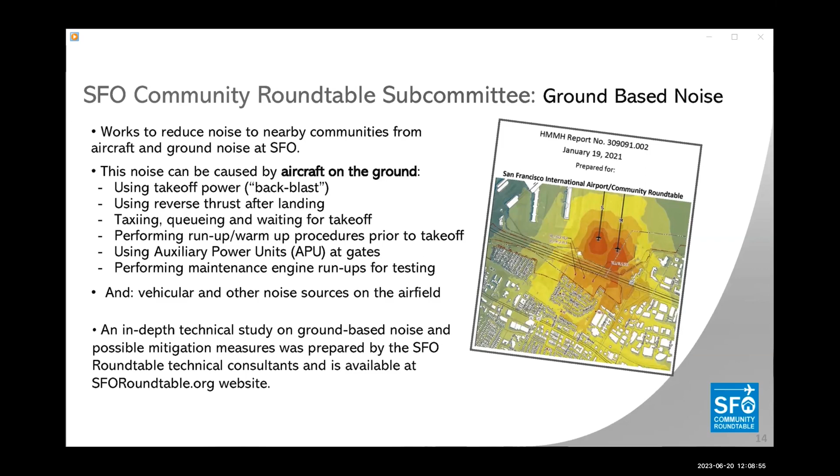The Ground-Based Noise Subcommittee works to identify and mitigate the noise impact of aircraft takeoff and on the ground at SFO, and other SFO operational noise. SFO Roundtable consultants have prepared an in-depth study on ground-based noise at SFO, available on the Roundtable website.

The Legislative Subcommittee reviews and advises the Roundtable on proposed legislation and FAA actions, as well as monitoring the actions of the Congressional Quiet Skies Caucus and legislative activities of other groups.

The Portable Noise Monitoring Placement Subcommittee makes recommendations for the placement of SFO's portable noise monitors. The Work Plan and Strategic Plan Committees develop plans for short-term and longer-term goals and priorities for Roundtable activities.

The Roundtable has long focused on the detrimental effects of nighttime airplane noise. Nighttime noise is not just an annoyance, but a serious health issue for residents. Many health studies have found that nighttime noise, including airplane noise, may cause significant health impacts, including increased risk of cardiovascular disease, impaired control of blood glucose, and increased inflammation. In addition, sleep deprivation can interfere with learning for children.

In 2016, the Roundtable made a recommendation to the FAA to create a new nighttime noise abatement flight procedure that would replace a noisier departure path. After extensive collaboration with SFO, the FAA, the airlines, the public, and a dedicated local member of Congress, the night departure southbound transition was implemented in May 2022.

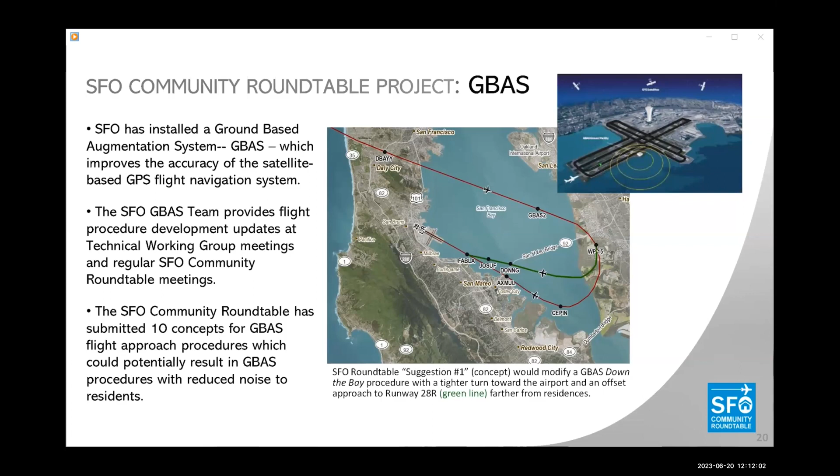The Roundtable has submitted concepts for possible GBAS flight procedures, which, if implemented, could potentially decrease flight noise to residents.

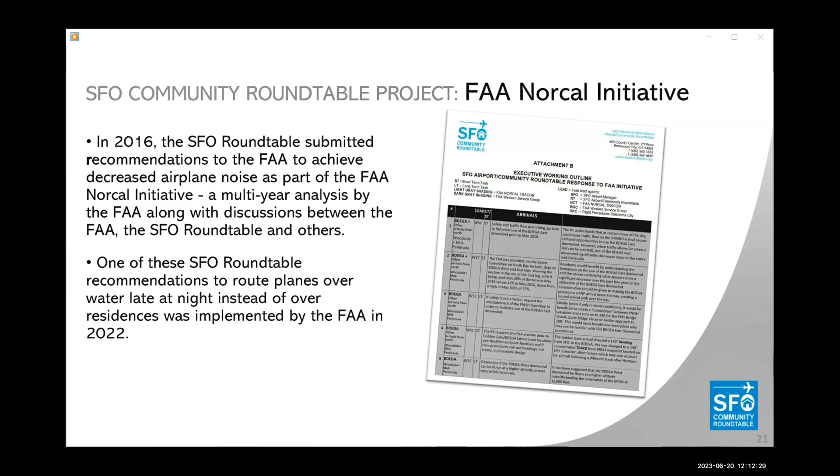In 2016, the SFO Community Roundtable submitted recommendations to the FAA for changes to flight procedures which could decrease noise. After a multi-year FAA analysis and many stakeholder discussions, several of the recommendations were deemed feasible. One of these, the night departure southbound transition, a nighttime noise abatement procedure, was implemented.

Lastly, we invite you to visit the SFO Community Roundtable website, where you'll find the Noise 101 program and other aviation resources, along with Roundtable meeting materials, archives of previous meetings, and technical reports from the FAA, SFO, and Roundtable technical consultant. Thank you for joining us today for this Noise 101 introduction to the SFO Airport Community Roundtable.

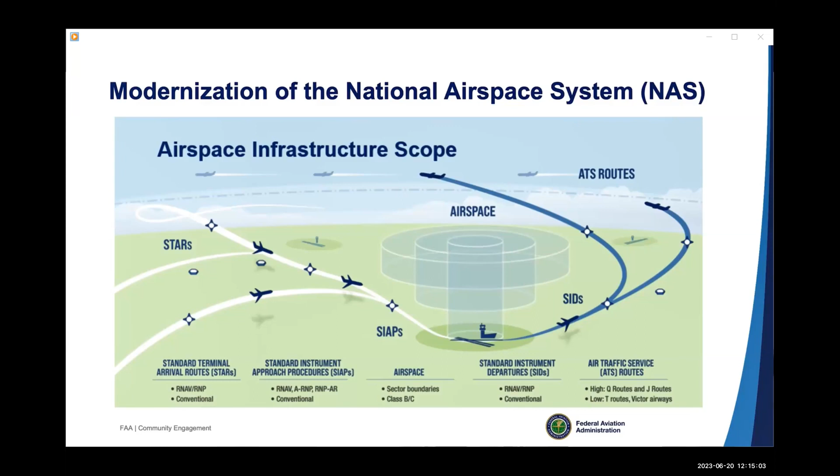These components all come together to deliver safe and efficient air traffic services. Our objective is to deliver the right airspace and procedures to meet current and future needs, optimize the inventory so that the FAA does not maintain unnecessary procedures, and modernize the airspace and procedures to deliver maximum benefit within manageable scope. The FAA is developing an airspace modernization roadmap, which will serve as the agency's strategic plan to continuously evaluate and modernize the national airspace system.

The roadmap builds on the 2016 PBN NAS navigation strategy. The agency is working to determine regional priorities and modernization schedules based on current and projected operations and associated needs within respective service areas. The FAA will also work with regional teams to consider airspace infrastructure priorities based on integrated qualitative and quantitative data analytics and analysis to provide optimal returns in safety, efficiency, and sustainability.

To reach the next level of safety and efficiency, the FAA is continuously modernizing the airspace infrastructure so that it will accommodate expected growth in traditional operations and new entrants. Via our ongoing modernization efforts, the foundation and enabling elements of a modern aviation infrastructure are in place and delivering benefits today. Through collaboration with the aviation community, the FAA enabled the rebuilding of our aging infrastructure into a system that is prepared to accommodate new technologies and new entrants with a resiliency for future needs.

The future NAS will continue to improve flight safety and ensure the safe accommodation of aircraft, as well as non-traditional types of aviation, such as commercial space and advanced air mobility. For more information about air traffic management modernization or the next generation air transportation system, visit faa.gov or go directly to the links provided.

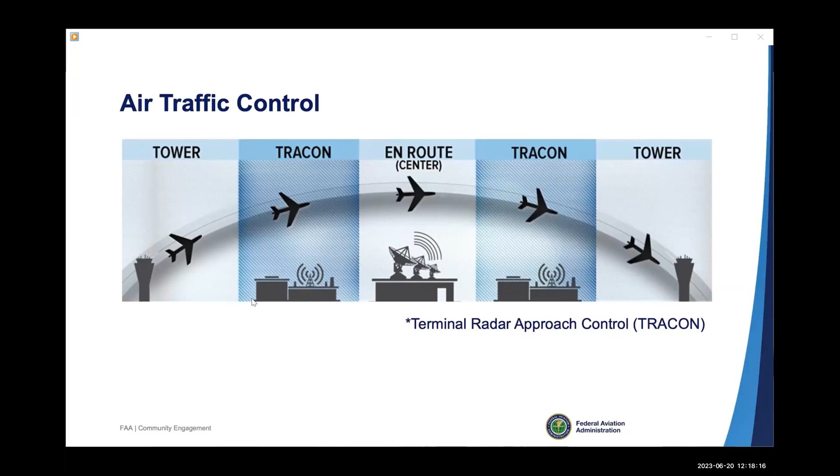FAA air traffic provides safe, secure, and efficient management for the national airspace system and international airspace assigned to U.S. control. Air traffic is responsible for airport traffic control towers, both federal and contract, terminal radar approach control (TRACON) facilities, air route traffic control centers, and combined control facilities to guide aircraft through their various phases of flight.

At the SFO Airport, tower controllers are responsible for all airport movement areas and airspace within approximately 5 miles of the airport and up to 2,000 feet above the surface. They separate all aircraft, including arrivals, departures, and overflights. The SFO tower controllers also issue clearances to allow visual flight rules (VFR) aircraft to enter, transition, or exit their airspace. They coordinate with Northern California TRACON and Oakland Control Tower regularly.

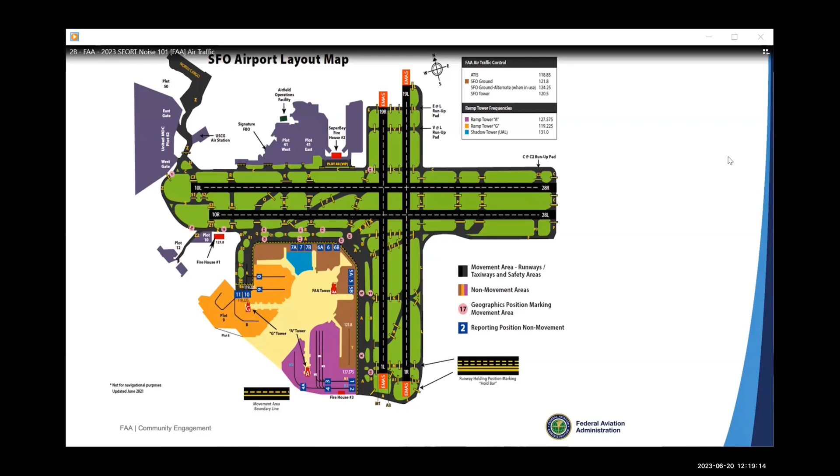Tower controllers are also responsible for ground vehicles in the protected area surrounding the runways and taxiways. Whether it is an aircraft, ground vehicle, or mower in the grass, everything that moves on the ground at an airport is controlled in some way by the controllers in the tower. In addition, controllers ensure flight plans for the aircraft are correct, give pilots permission to take off or land, cross runways, or taxi to active runways.

Safety is the FAA's #1 concern and will always take precedence. Airplanes perform best and have the greatest safety margins when they land and take off into the wind. Runway and procedure modifications at SFO were developed with both safety and noise in mind. The tower will assign noise abatement preferred runways as long as wind and weather permit.

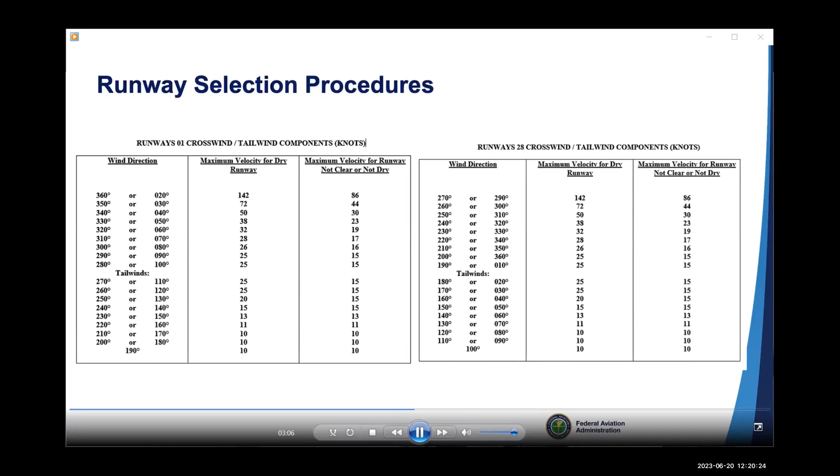Departures are paths assigned to an aircraft and determined by its destination. Departure routes out of the Bay Area must tie into the national route structure and then into the arrival route structure for the destination. The busiest air traffic corridor in California is between the LA Basin and the Bay Area.

The arrival paths assigned to an aircraft are also determined by its destination. There are many factors, however, that can force an aircraft to alter its route once airborne, such as weather, traffic volume, military activity, emergencies, and so on.

San Francisco arrivals are routed over the Oakland and San Jose arrivals, but must be under the San Jose Loop boomerang departures. Oakland arrivals are routed over San Jose arrivals, but must be under the San Francisco arrivals and the San Jose Loop boomerang departures.

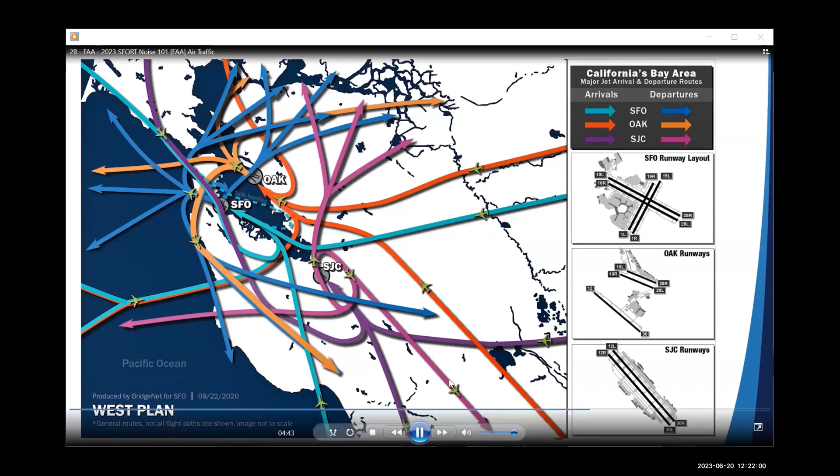Southbound departures off both Oakland and San Francisco are dynamically controlled to keep them separated from the San Jose departures and the San Francisco arrivals. These departures would typically be above oceanic arrivals.

Community-driven initiatives are made possible through the FAA's ongoing community engagement efforts, coordination with the SFO Airport Community Roundtable, and collaboration with stakeholders. In 2022, at the request of the SFO Roundtable, the FAA agreed to route southbound aircraft departing SFO and OAK between 1 a.m.

and 5 a.m. over the SFO Bay and either out over the Golden Gate Bridge to Gobbs intersection before turning them south-southeast, or down the bay using headings off runway 1 at SFO and runway 30 at OAK. This graphic shows the NIITE/HUSSH procedures and some 120 degree headings.

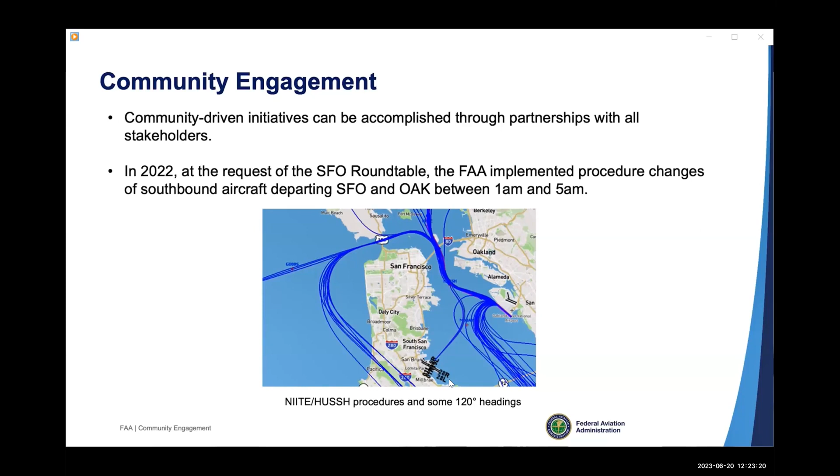The recent update to these procedures is one example of the change that originated with the community and was implemented through collaboration of various stakeholders.

For more information about the Western Pacific Region Community Engagement, NorCal workshops, and the Instrument Flight Procedures Information Gateway, visit FAA.gov or go directly to the links provided.

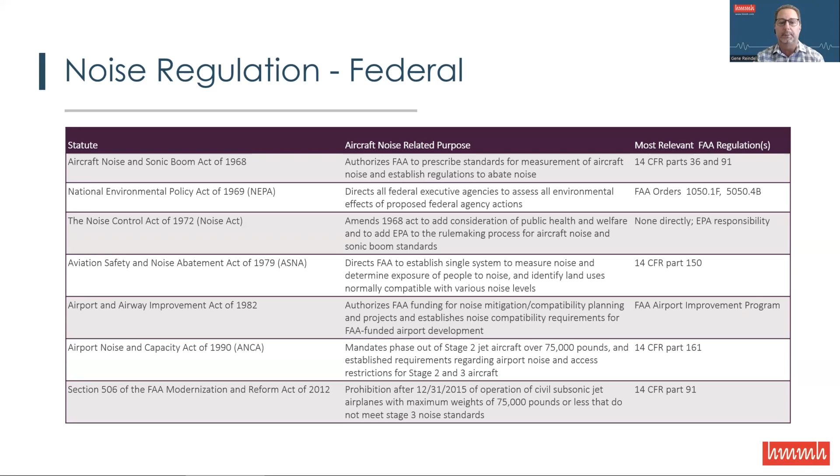I know this is a lot to take in, which is why this table is provided in the presentation for you to refer back to after this training. We will also go into more detail on those regulations that most affect the actions that airports, airport users, the FAA, and local jurisdictions can implement as a result of the current regulatory environment.

While NEPA was enacted by the US Congress in 1969, there have been several regulations since that time to update its implementation. In addition, the FAA has updated their implementation of NEPA for federal actions related to aviation. This slide provides the current FAA guidance for the implementation of NEPA.

Over recent years, there has been a lot of community concern with the FAA's use of CATEX. There are three levels of environmental analysis at the FAA's disposal, ranging in complexity. The lowest level is a categorical exclusion, known as CATEX. The FAA has identified six federal actions, listed on the right side of the slide, that do not individually or cumulatively have a significant effect on the human environment. All other federal actions require an environmental assessment, or they require the most complex level, an environmental impact statement.

Regardless of the NEPA analysis level, the noise thresholds are the same in determining impact. The significant impact threshold is a 1.5 decibel increase within the 65 decibel CNEL area. CNEL will be discussed later, but suffice it to say it is a cumulative noise metric representing an annual average 24-hour day with weightings of aircraft noise that occurs in the evening and night hours. In addition to the significant impact threshold, the FAA has set two less-than-significant impact thresholds, which are also reportable: a 3 decibel increase between the 60 and 65 CNEL, and a 5 decibel increase in the 45 to 60 CNEL range. The FAA has also developed the color coding shown in the table in the bottom left of the slide for consistency in displaying significant and less-than-significant impact areas.

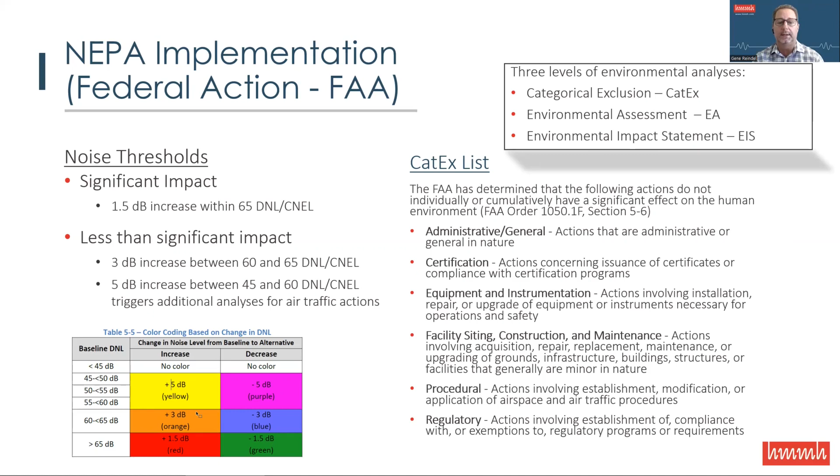Now we will shift to land use compatibility regulations. The FAA created the voluntary airport noise compatibility planning process in response to ASNA, the Aviation Safety and Noise Abatement Act of 1979. This process is known as Part 150. The primary reason airports participate in this voluntary process is to obtain access to federal funding to help support the implementation of noise compatibility program measures aimed at reducing incompatible land uses near airports. It is worth noting that the intent of Part 150 is not to address community annoyance, but specifically to address land uses near airports that are deemed incompatible with aircraft operations.

So Part 150 includes two primary elements. The first, the noise exposure map process, results in an inventory of incompatible land uses within the 65 CNEL contours. Second, the noise compatibility program results in a list of airport recommendations to reduce incompatible land uses.

The FAA accepts or does not accept the documents submitted by the airport as meeting Part 150 requirements, and the FAA either approves or disapproves each of the airport recommended NCP measures individually. Those measures approved by the FAA are then potentially eligible for federal funding for implementation.

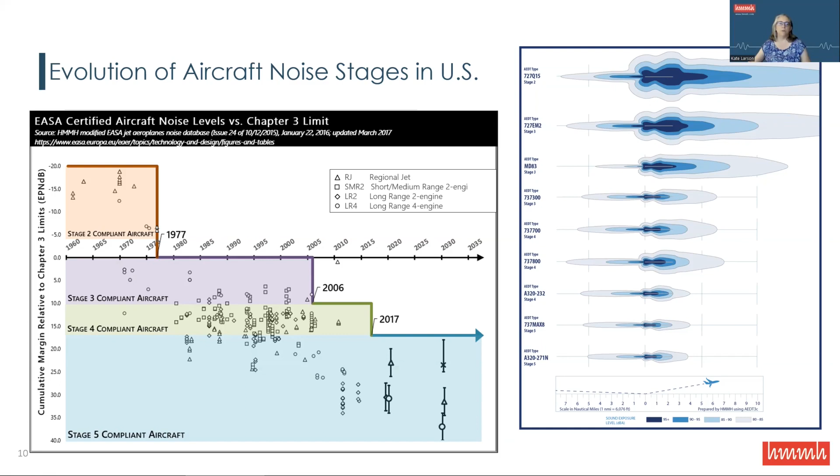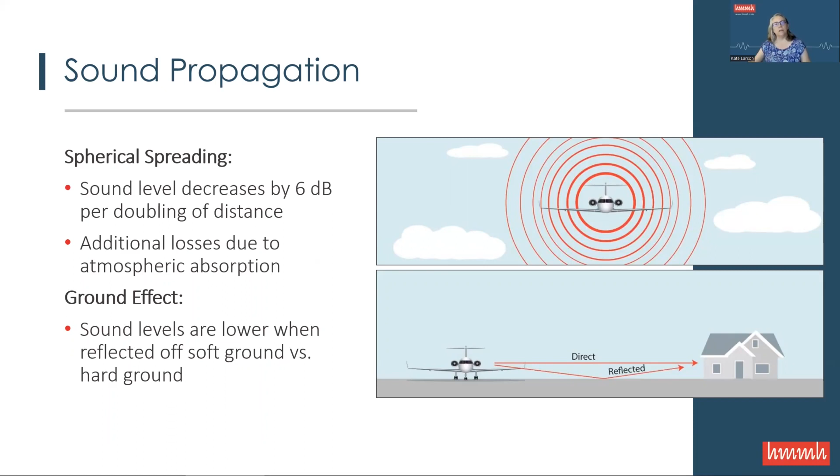As the sound travels or propagates through the air in free field conditions, it decreases by 6 decibels every time the distance doubles. That decrease is actually somewhat greater due to the effects of atmospheric absorption. When the noise source is on the ground, there can be sound reflections that change the quality of the sound that is transmitted. Soft ground, such as fields, absorb more sound than hard ground, such as pavement or water.

Sound propagation is also affected by weather conditions. When the air close to the ground is warmer than the air in the atmosphere above, the sound waves can bend upwards, reducing the sound intensity to nearby receivers on the ground. However, during a temperature inversion, for example, as the day's warmth rises at night, the sound waves can bend downwards, seeming to amplify the noise.

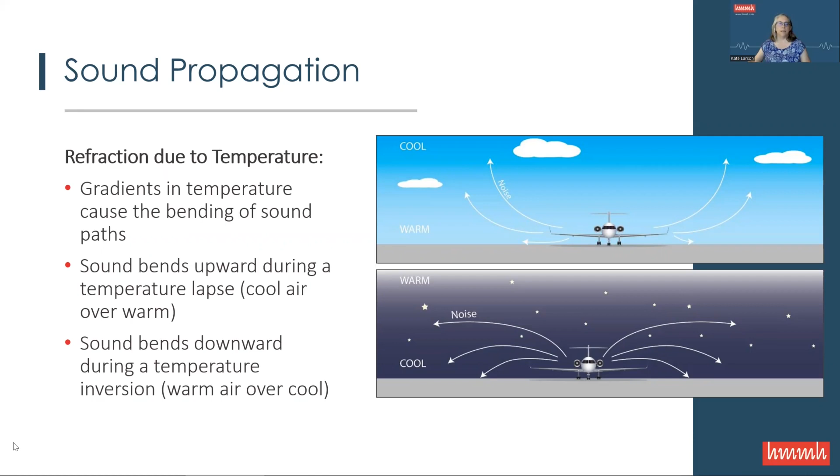Wind also influences sound propagation of ground noise. Locations that are upwind from a source may experience sound shadows, which reduce sound intensity, while people at locations that are downwind would hear the sound more clearly. The differences on either side of the noise source can vary by as much as 20 decibels due to wind effects.

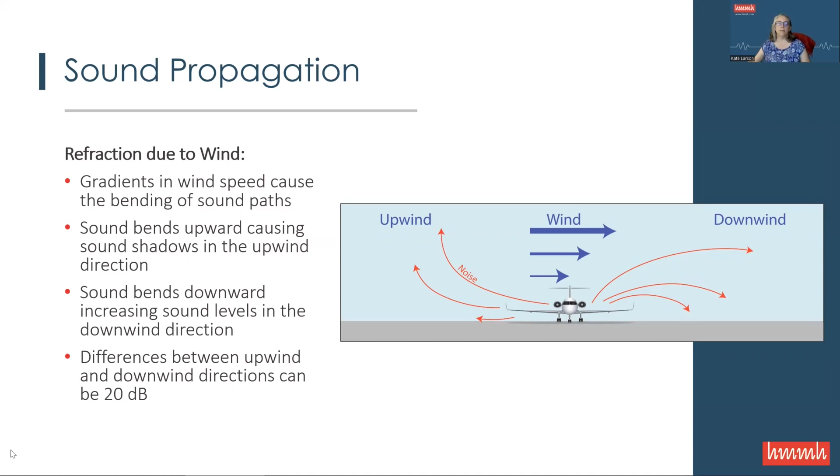We use A weighting for all environmental noise analysis in the United States because it matches closely with how humans perceive loudness in our everyday environment. The frequencies between 1,000 and 6,000 hertz are accentuated slightly because that's where our hearing is most acute. Human speech falls in that frequency range. The lowest frequency sounds, think whale noise or lower, are de-emphasized. The lower the frequency, the more the sound energy is discounted.

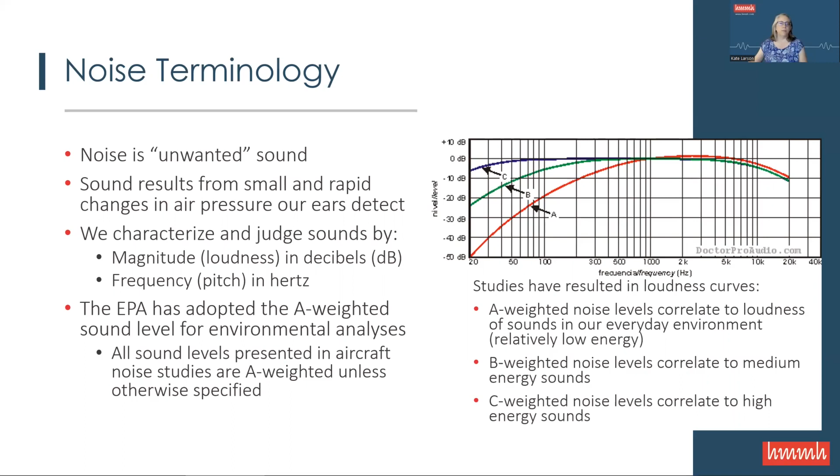The highest frequency sound energy, think dog whistles, is also discounted in the A weighting. This is not to say that we do not hear low and high frequency sounds, but that we do not hear them as well as sounds in our speech frequencies. The FAA's Neighborhood Environmental Survey reconfirmed that annoyance tracks with A-weighted decibels.

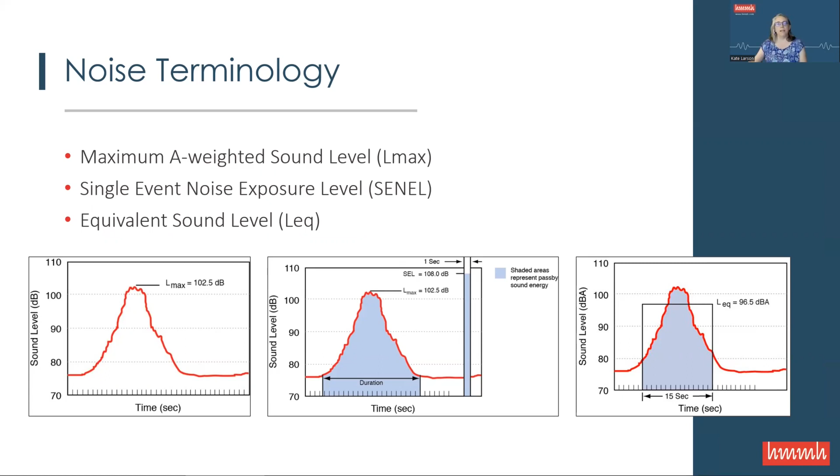As described in our discussion of federal and state noise regulations, relative noisiness in different locations is judged by a cumulative noise metric that incorporates both the loudness of noise events and a time aspect. How long do individual events last, and how often do they occur? In addition to considering the time of day when the noise is happening. CNEL is the cumulative metric used by the state of California.

To account for the increased intrusiveness of nighttime noise, which occurs when ambient sound levels are typically at their lowest and people are trying to sleep, a 10-fold weighting, equivalent to adding 10 decibels, is applied to noise events from 10 p.m. to 7 a.m. Likewise, evening noise events are weighted threefold, which is equivalent to adding 4.7 decibels to events between the hours of 7 p.m. and 10 p.m.

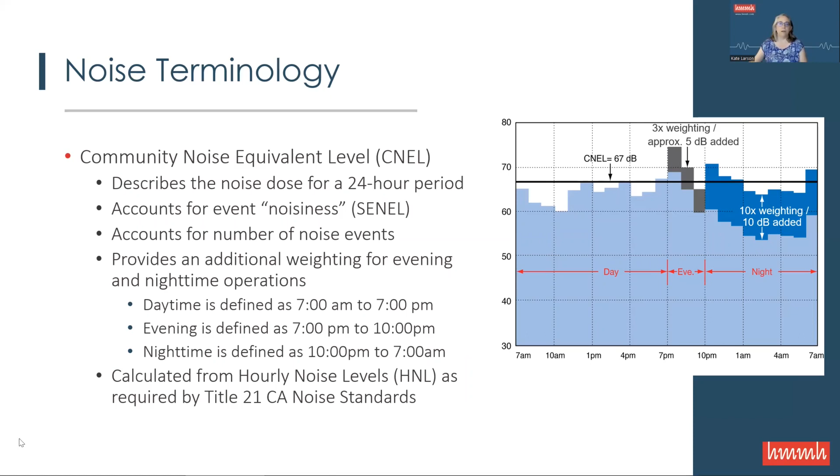DNL, the cumulative metric that has been adopted by the FAA, is akin to CNEL, but without the evening weighting. FAA allows for the use of CNEL in California because of the adoption of Title 21.

Other noise metrics are sometimes used that relate more directly to how people experience noise on a daily level, as opposed to averaging. One of these metrics is number above, sometimes abbreviated NA. This metric counts the number of noise events whose maximum level exceeds a given threshold.

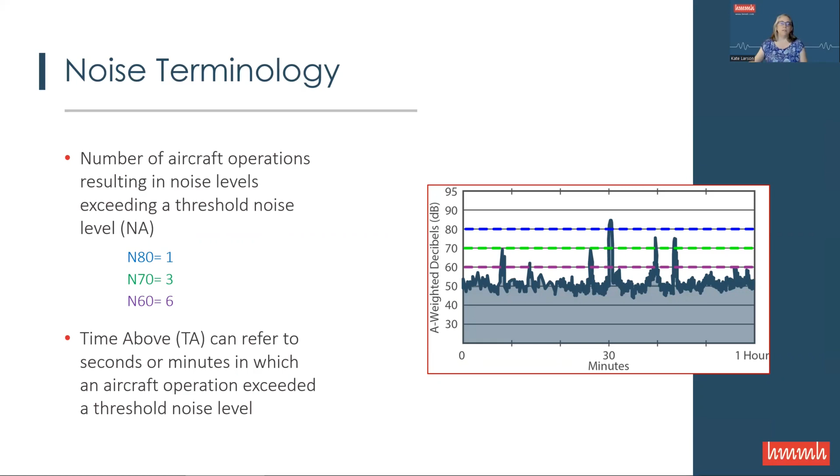A time above metric is also easily understood. For any given threshold, the number of seconds that the measured noise level is over the threshold is the TA value. TA can be expressed in any units of time, such as hours, minutes, or seconds.

The monitors collect data on all sound from both aircraft noise sources and non-aircraft noise sources. When the system can correlate a noise event with an aircraft operation, the aircraft noise can be separated out, but the identification of aircraft noise from community noise is not always accurate. Certain SFO noise monitors provide measurement data that is used to validate the extent of the computer-generated noise contours, specifically the 65 CNEL contour, as stipulated by Title 21.

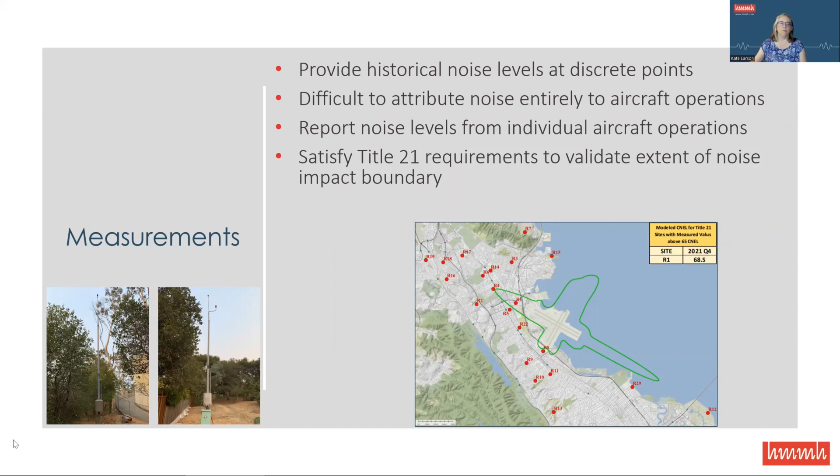Noise modeling calculates noise levels at thousands of evenly spaced grid points over the entire airport study area, far more points than the 20-odd measurement locations. The model calculates the noise contribution of every modeled aircraft operation.

Modeling can generate past noise levels for comparison to measurement data, and modeling can also be used to predict future noise levels, given forecast scenarios of aircraft operations. FAA requires that modeling be used to determine noise contour lines, which in turn are the basis for federally funded noise mitigation programs addressing land use compatibility.

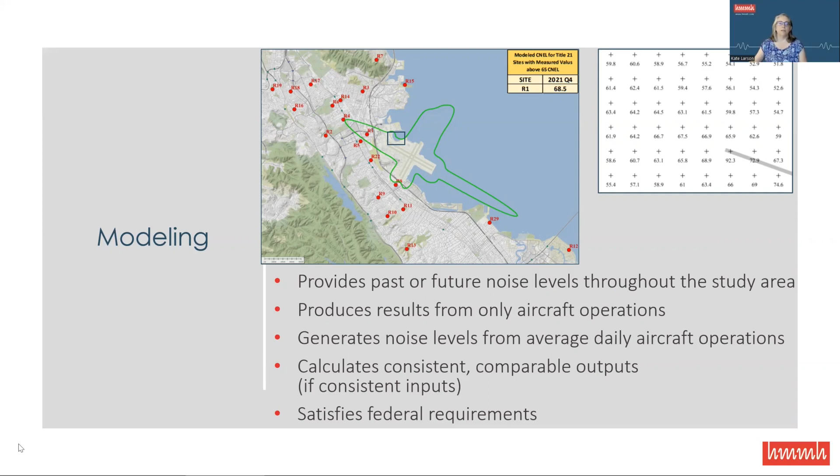It is vitally important to understand the difference between land use compatibility, which is addressed via Title 21 and Part 150 using the 65 CNEL contours, and community annoyance, which is difficult to quantify.

Community annoyance is not fully addressed through land use compatibility programs. Unlike land use compatibility, annoyance is not limited to the 65 CNEL contour.

This fact is confirmed through the FAA Neighborhood Environmental Survey, which showed that up to 40% of the population is annoyed at levels lower than 65 CNEL.

It is also important to know that there are currently no regulations, federal or state, that address community annoyance with aircraft noise. The regulations address land use compatibility.

However, as verified through the FAA's NES survey, DNL is correlated to community annoyance of aircraft noise. This can be assumed to apply to CNEL, as those two noise metrics are calculated similarly.

One of the noise mitigation measures for incompatible land uses provided through Part 150 and Title 21 is sound insulation. Once sound insulation treatments are properly installed and the average interior noise level is 45 dB or less...

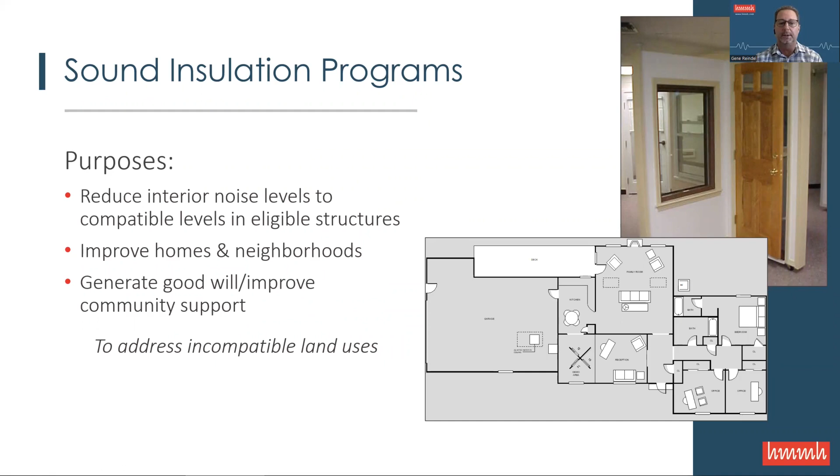SFO was one of the first, if not the first airport to implement a sound insulation program. This resulted in SFO fully complying with Title 21 so that they do not require a state variance to operate. They have no incompatible land uses within the noise impact boundary.

Not to imply that SFO has provided sound insulation to all structures within the 65 CNEL contour. SFO has made a reasonable attempt at providing mitigation to all incompatible structures through their noise insulation program, or NIP...

...but not all homeowners have applied for the voluntary program. Title 21 requirements have been met.

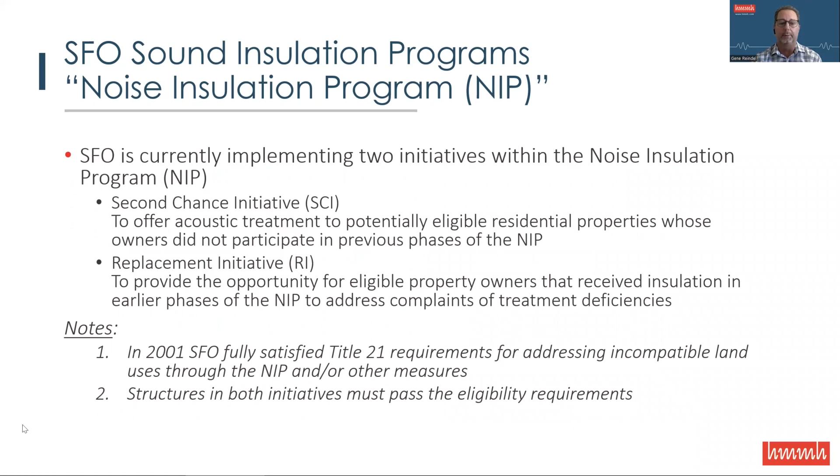Even so, SFO continues to provide two initiatives within their noise insulation program, or NIP. These are explained on the next two slides.

The Second Chance Initiative provides the opportunity for homeowners that did not previously submit applications to apply for the NIP. To be eligible for treatments, the property must be within the 65 CNEL contour of an FAA accepted noise exposure map.

The average interior noise level of habitable rooms must be verified to be 45 dB CNEL or greater. The structure must have been built prior to October 1st, 1998, and the property owner must not have accepted noise insulation or an easement in previous NIP phases.

The Replacement Initiative provides the opportunity for eligible property owners to apply for replacement treatments to address deficiencies in those treatments that were previously installed to make the property compatible with aircraft noise.

SFO must determine that there are deficiencies in the previously installed treatments for structures to be eligible for this initiative. If current deficiencies are a result of accidents or improper maintenance, they are not eligible for the replacement initiative.

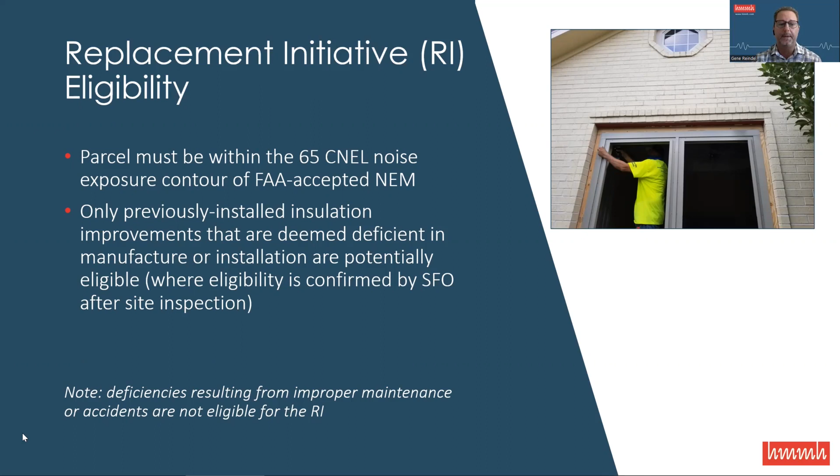In the final topic on aviation noise fundamentals, I want to briefly address the need for a balance of aircraft noise management techniques, such as those in operation at SFO.

Airport noise offices strive to maintain an equilibrium that allows for the continued safe operation of the airport while minimizing adverse effects of aircraft noise.

In addition, the noise office addresses community concerns, explains the function and operation of the airport, and is a resource for media relations. This is accomplished successfully through collaboration, transparency, and responsiveness.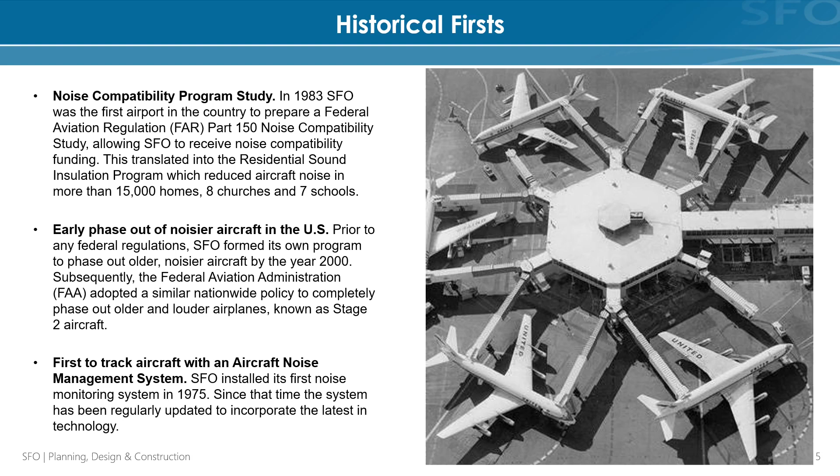SFO was also the first airport to seek early phase-out of noisier aircraft in the United States. Aviation buffs will know that the year 2000 was the demarcation between Stage 2 and Stage 3 aircraft, Stage 3 being quieter. SFO had achieved 98% about 2 years prior to that. The first airport to track aircraft with a noise management system also goes to SFO, in 1975.

SFO is owned and operated by the City and County of San Francisco. It is landlocked within San Mateo County. The airport does serve as the landlord in a broad definition of the terms, much like a shopping mall in your area. The airport does have some control over issues such as when the tenants, airlines, can do maintenance run-ups, testing of the engines.

We have certain restrictions for that at night. We're also the most visible and closest point of contact for the community, and generally in charge of explaining and implementing noise programs. So the airport's pretty responsible for monitoring noise levels and reporting them to the public, as well as taking remedial actions in soundproofing homes in high noise areas.

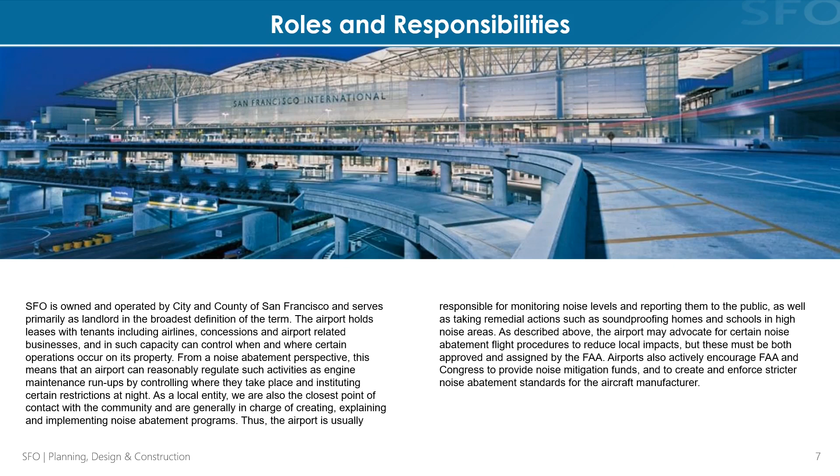The SFO aircraft noise management structure, breaking it into 5 areas. Quieter planes: we advocate for future quieter technology and ensure that the residents share in the benefits. Quieter procedures: we're assisting in developing noise mitigation procedures that benefit communities.

Working with communities, we have open and transparent communication leading to constructive dialogue and good outcomes, understanding community concern, and providing accessible information. Land use planning and mitigation.

We reduce the environmental impact through compatible land use planning and our residential sound insulation program. And our noise program monitors the existing flight operations, follows up with the airlines if there are deviations, and reports back through our Fly Quiet program and our noise action plan.

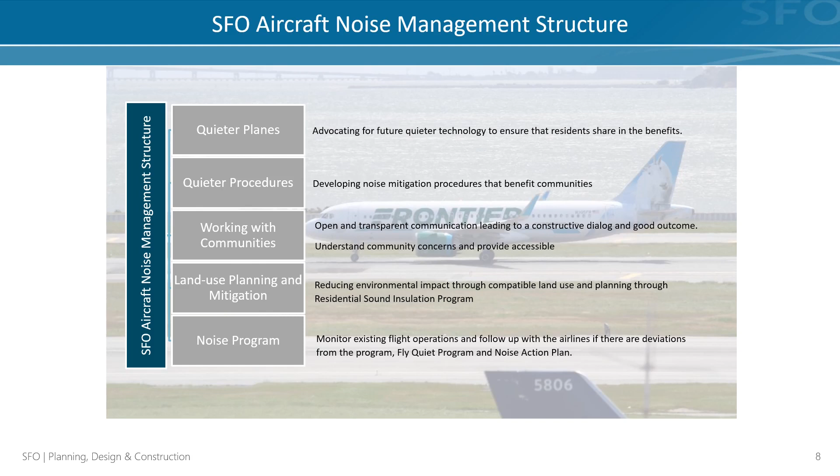How does the noise management system work? Well, basically we have input, analysis, and output. Input: we take in flight track data, weather data, wind speed, audio files, noise reports.

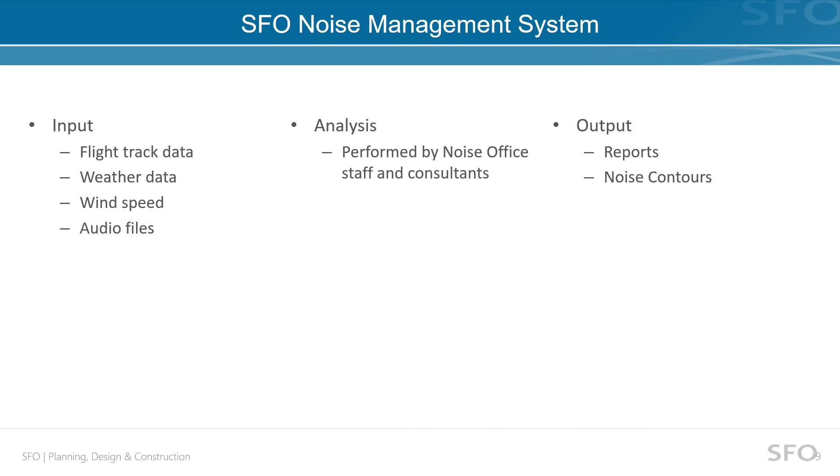General information from as many sources as we can tap. We then do analysis, performed by the noise office staff and our consultants. And the output of this is generally reports, noise contours, and information.

Our procedures: major arrival and departure routes, on-airport noise restrictions, nighttime preferential runway use, the general aviation program that we watch, and the Fly Quiet program.

Our noise abatement procedures combine elements of the Federal Aviation's Part 150 Noise Compatibility Plan, the City and County of San Francisco noise resolutions, the FAA's air traffic control, and the Airport Community Roundtable.

Looking at runway use, departure and arrival procedures goes into our voluntary and regulatory programs, but safety always takes precedence over noise abatement procedures.

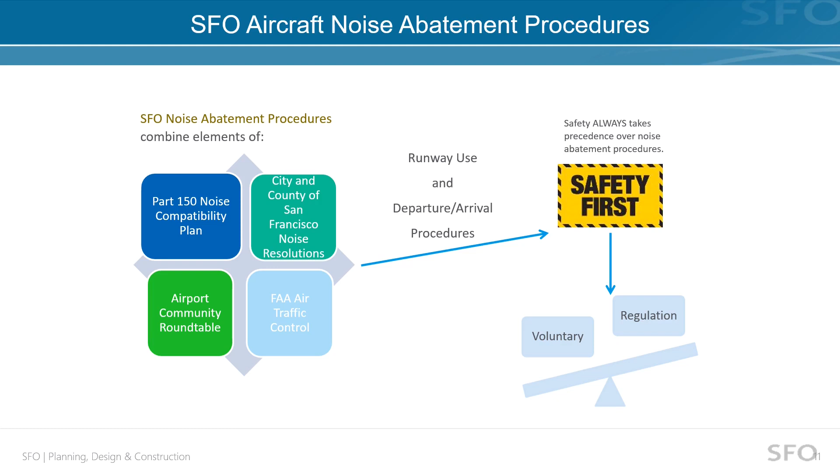Key components: we use the water-facing runways whenever wind and weather conditions allow. Runways 1 left and 1 right facing north are best for departures because they get the aircraft over water. Runway 28 left and 28 right are best for arrivals because they keep the aircraft over the bay.

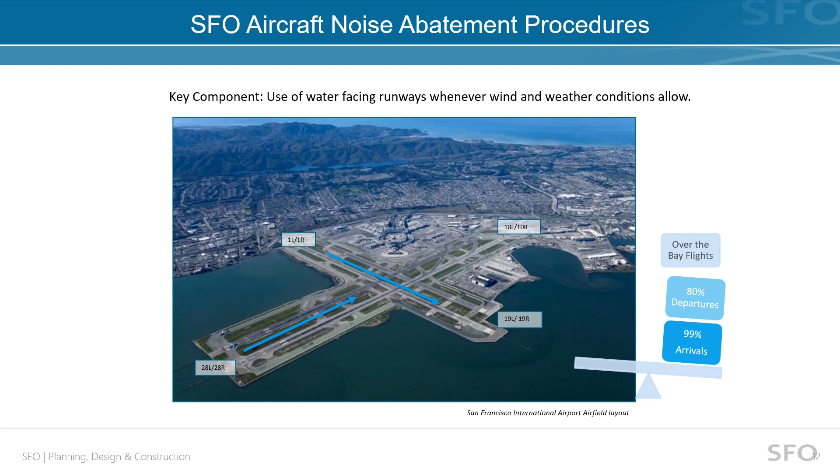Over water flights for departures, we're looking at approximately 80%, and for arrivals, 99%.

On this slide, we're looking at SFO's noise abatement procedures, mainly our operations: the West Plan and the Southeast Plan. The West Plan is what you might consider our standard flow for all the airports in the Bay Area, and the Southeast Plan is a general reverse flow for when weather comes through the Bay Area.

We do this for safety, and that's when we operate into the wind. The air traffic control tower makes the call on which runways are in use at a given time. Generally speaking, west flow is 97%, Southeast Plan is approximately 3%.

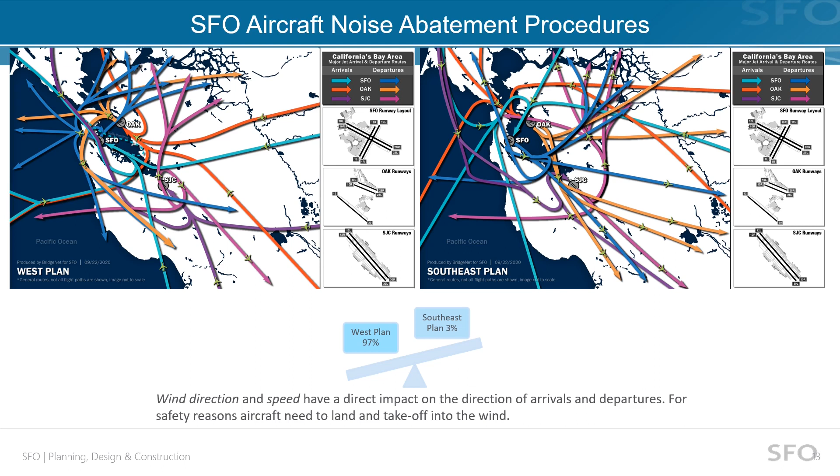In our Fly Quiet program, we monitor the Airport Community Roundtable initiative that we implement at the airport. It encourages individual airlines to operate as quietly as possible at SFO. We promote a participatory approach in complying with noise abatement procedures and objectives by grading an airline's performance and making the scores available to the public via publications and public meetings, and occasionally it's published.

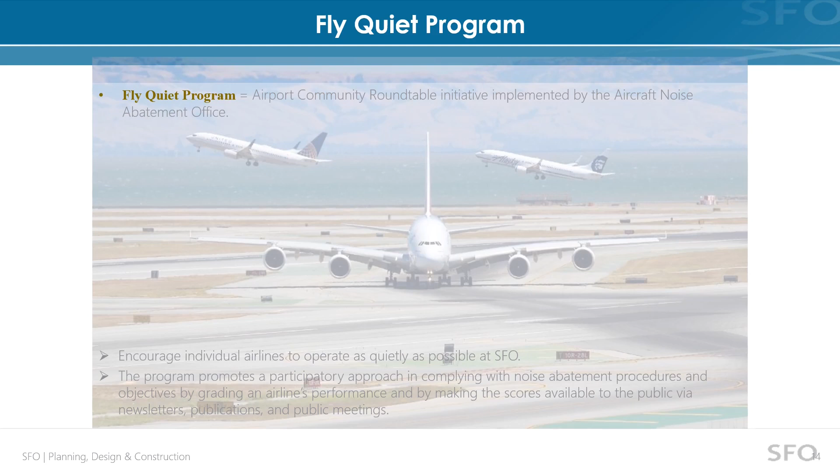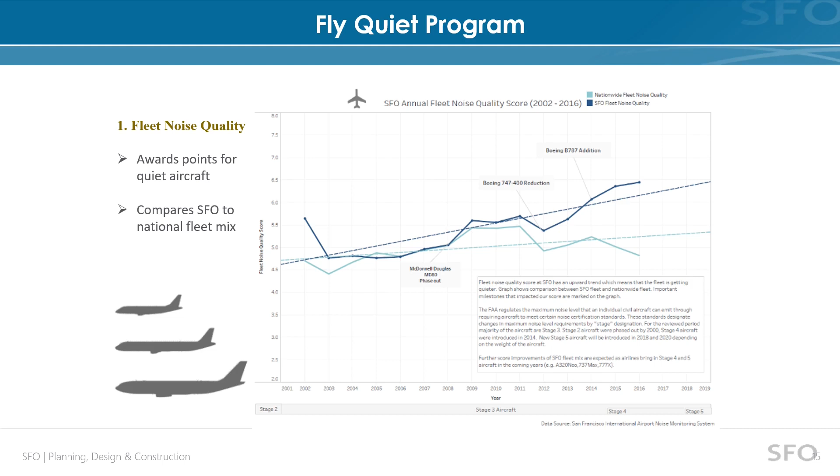The first item is our fleet noise quality. We award points for quiet aircraft. We compare SFO's operations to the national fleet mix of a given airline. We're happiest when we see them using their quieter airplanes here at SFO.

The second item is the noise exceedance rating. We have 29 monitors up and down the peninsula, continually monitoring noise. We have maximum decibels set, with a 10 decibel penalty for nighttime, at each of our monitors when we evaluate.

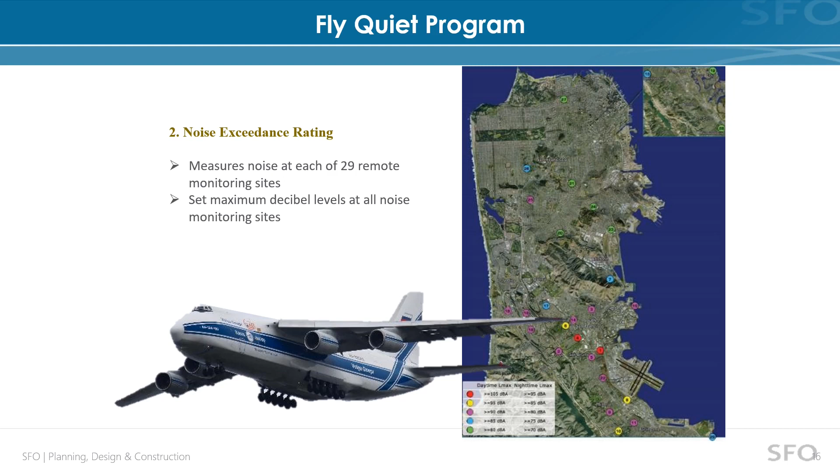The next components of our Fly Quiet program are the nighttime preferential runway use, where we ask that airlines depart over water between 1 and 6 a.m., depart over land and turn over water, and least preferred, depart and climb over land.

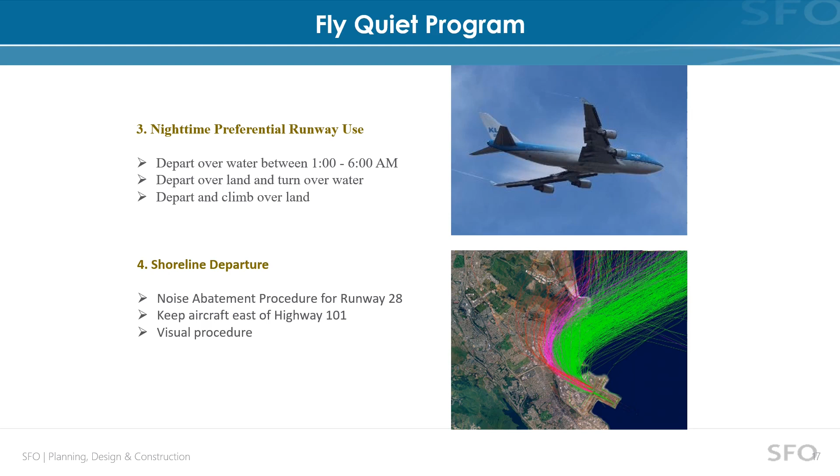For the shoreline departures, going back to the one before, departing over land and turning over water, for runway 28 to the west, this keeps aircraft east of Highway 101, primarily a visual procedure.

The gap departure rating: we rate airlines based on individual aircraft and whether it's operating domestically or internationally. Generally speaking, higher is better, and we compare similar aircraft on similar routes.

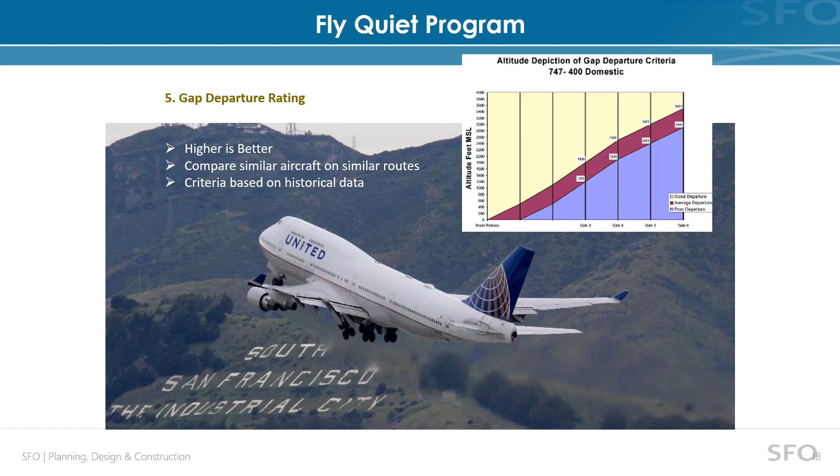Criteria is based on historical factors. The last of our components are the Foster City Fly Quiet rating and the Fly Quiet program: 2 points for a good arrival, in green, out over the bay; 1 for marginal, in yellow; and 0 for a poor arrival, in red, particularly those flying through the outlined red home plate looking shape over Foster City.

It's limited to jet airlines arriving between 11 p.m. and 6 a.m. to runways 28 left and right.

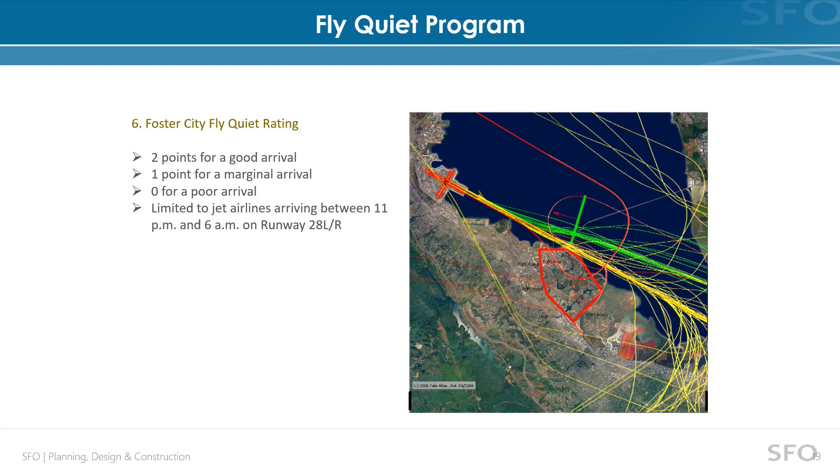The results of our Fly Quiet program: airlines have responded favorably, they want to improve. Scores are going up, noise is going down.

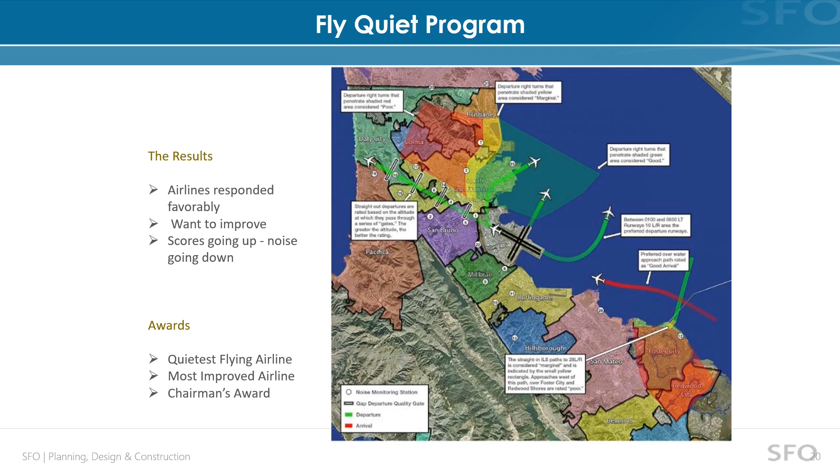The awards to recognize the airlines are the quietest flying airline, which is a mathematical formula; the most improved airline, those that have improved the most over the year; and the Chairman's Award. This one's somewhat arbitrary, but it's based on airlines that participate with the roundtable and/or the Aircraft Noise Abatement Office. We report those to the chairman, and based on observation and performance, we'll make the selection.

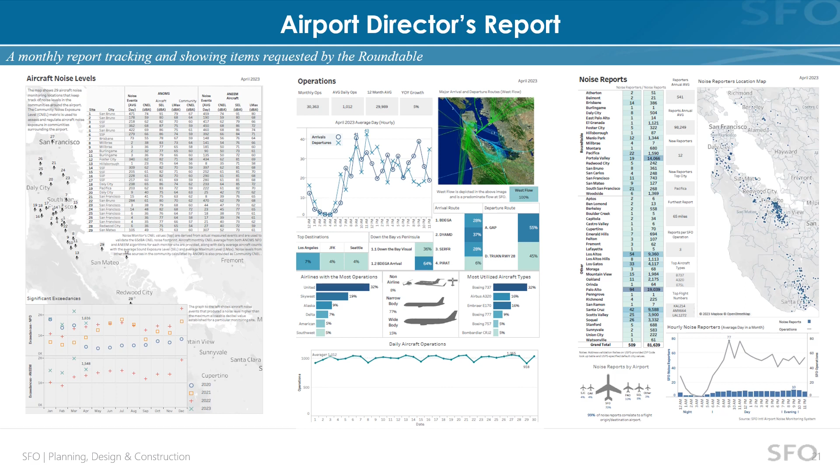Some key takeaway items for us today: although noise has decreased over the last 40 years, it had been stable for the last 10 years through 2019. Obviously COVID had a big hit on that, and noise dropped considerably. With the recovery of flights following COVID, we're seeing an increase in noise issues. NextGen also contributed to that, as well as social media and political engagement.

The current standard for land use compatibility and noise impact is day-night level 65 decibels. Hearing impacts from airport noise are unlikely in nearby communities. Other health effects are complex and being studied. Annoyance to aircraft noise seems to be increasing and is currently being reviewed by the FAA in various ways.

The Noise Office is working on noise items such as ground-based noise that are not governed by state or federal government, and are part of being a good neighbor. Attitude towards the noise source is an important influence on annoyance levels, and our website, noise.flysfo.com, is your best resource for questions and information.

I've included this cartoon. It was procured by one of the former coordinators for the roundtable from the author, and I thought it should be reused.

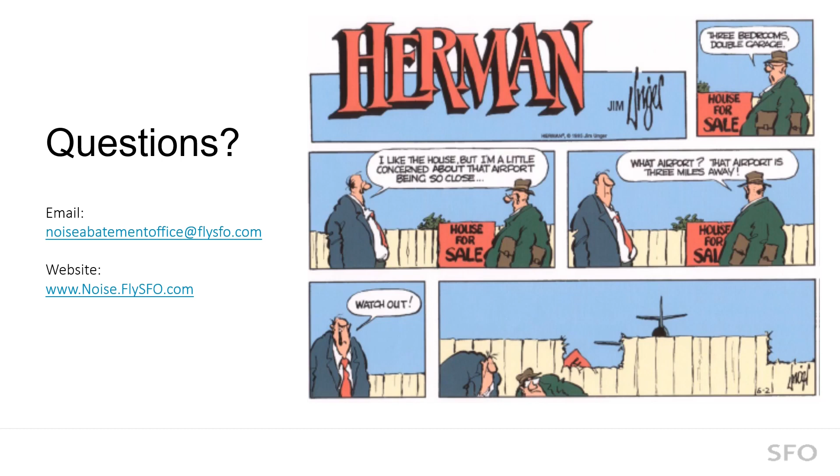Best way to get a hold of us is the noise abatement office at flysfo.com, and the best source for information, where you can do a lot of research as well as looking at things that you can control, to view the noise, is noise.flysfo.com. Thank you.

The ground-based augmentation system at the San Francisco International Airport is an airport-owned navigational aid that is part of an industry-leading effort to explore and implement approach procedures that reduce noise.

The GBAS, as we often refer to it, augments the existing satellite-based navigation capabilities of aircraft. This is achieved through the installation of remote satellite measurement units, which are very small antennas installed in precisely known locations on the airport. Each of these antennas receives information from the GPS constellation, which is used to calculate real-time position correction information specific to the Bay Area and the runways at SFO.

The corrections are transmitted to arriving flights, enabling properly equipped aircraft with a trained flight crew to improve their three-dimensional positional accuracy from hundreds of meters to a very precise 10 to 15 meters.

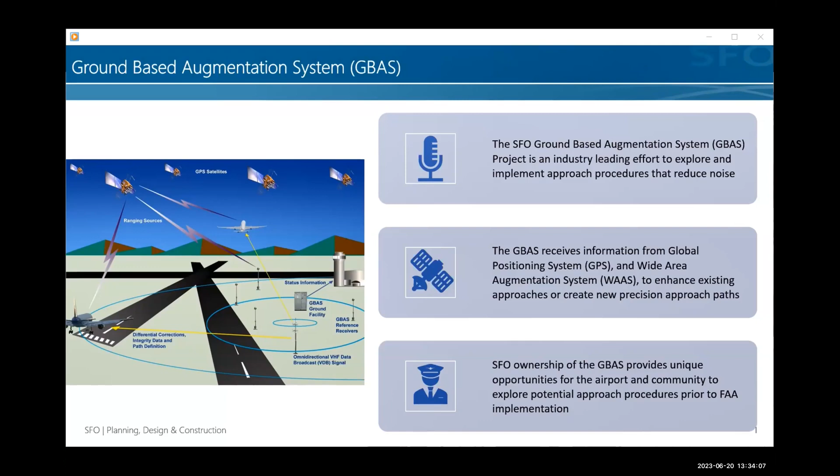In a constrained airspace environment like the Bay Area, navigating to this level of precision enables new opportunities to enhance safety, improve existing approach procedures, or create new precision paths to the runways. But what makes the SFO GBAS innovative is not limited to the navigational technology, but the process that SFO, the FAA, and the Bay Area communities are undertaking to collaboratively evaluate and establish new innovative GLS procedures.

The GBAS project at SFO has 4 goals. First and most important is to reduce noise impact to the community. This will be achieved through the evaluation, implementation, and monitoring of GLS approach procedures that take advantage of the NAVAID's unique capabilities, including a combination of higher altitudes for aircraft on approach, steeper angles of descent, and the creation of repeatable paths that keep descending aircraft more closely focused over the water.

The second project goal is to create redundant ILS capabilities. Today, San Francisco International Airport is served by 3 instrument landing systems on runways 28 left, 28 right, and 19 left. For many years, each of these precision NAVAIDs has provided safe flight paths for aircraft landing at SFO under inclement weather conditions. However, instrument landing systems are very sensitive to construction activities or large objects that pass in front of them.

This results in multiple times during the year when one or more ILS are out of service. The SFO GBAS will enable the airport to maintain ILS-like capabilities regardless of construction activities or during periods of high aircraft operational volume. The third goal is to enhance the efficiency of approach operations into the airport.

This will be achieved through the design of more direct paths to the runways that yield reduced track miles. Optimization of the vertical profile will also yield a more energy-efficient descent that reduces fuel consumption and greenhouse gas emissions.

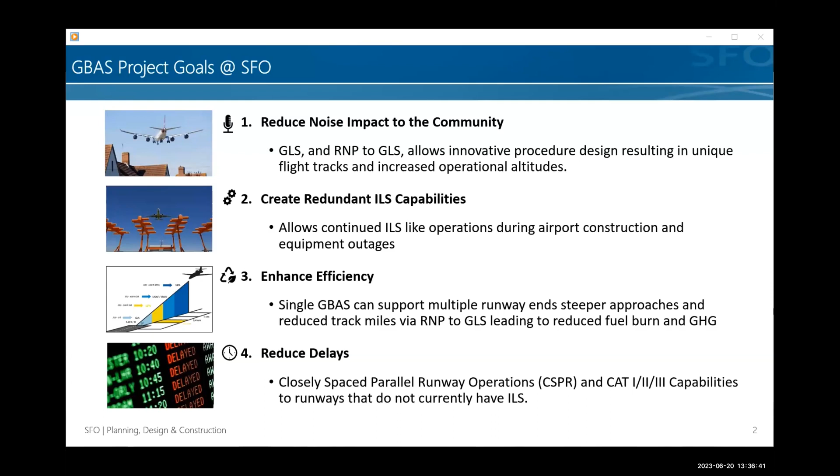In order to achieve the project goals, there are several important pieces of information to know about ground-based augmentation systems in the United States and the GBAS here at SFO. First, a single GBAS can maintain 48 unique approach procedures, referred to as GBAS Landing System, or GLS approaches. These can be distributed amongst one or more ends of the runway. For example, one runway could have 48 different GLS approaches, or each runway end could have 6 GLS approaches.

Today, the GBAS project team has been focused on approaches to runways 28 right and 28 left, as 95% of all flights land on one of those 2 runways. Second, the current range at which an aircraft's satellite-based navigation can be augmented by the GBAS is limited to 23 nautical miles away from the NAVAID. However, the precision navigation portion of the approach segment, 10 to 15 meter accuracy, is limited to 10 nautical miles from the end of a runway.

This is because the current FAA approach procedure design criteria for a GLS limits the precision augmentation to only the final approach segment. In the future, this may be expanded to cover other portions of the approach, or could potentially be applied to arrivals or even departures in the distant future.

Today, approximately 30% of flights arriving into San Francisco are capable of using GLS approaches. However, all new narrow-body and wide-body aircraft currently in production or planned have the ability to fly GLS approaches. We therefore expect to see the percentage of GLS-capable operations at SFO increase year over year.

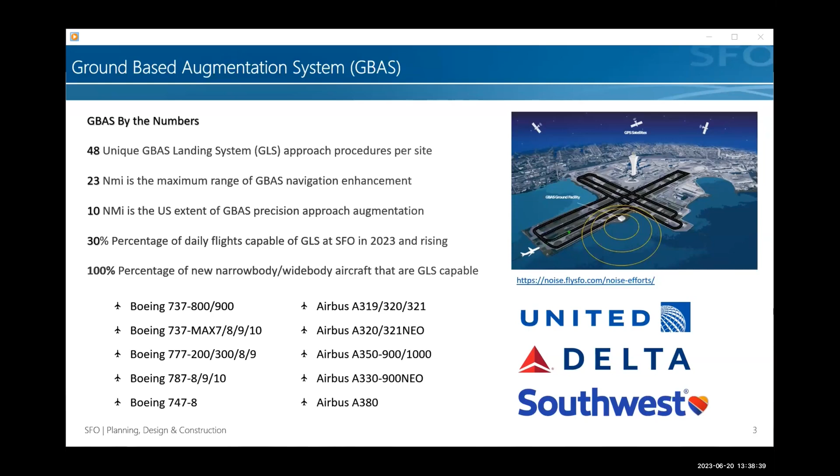Today, the top two operators of GLS approaches are United Airlines and Delta Airlines, followed by multiple international air carriers that take advantage of the global availability of GBAS and GLS approaches in their home countries. It is also important to note that Southwest Airlines is currently in the process of training their flight crews to use GLS approaches, with a target activation date later in 2023.

Knowing the capabilities of the GBAS and the increasing number of GLS-capable narrow-body and wide-body aircraft arriving into SFO, the GBAS project team has developed a multi-phased strategic timeline to achieve the project goals. The first phase of the GBAS project is referred to as Gaining Experience.

In this phase, 4 GLS approaches have been developed by the FAA, which are identical to the existing ILS and RNAV GPS approach procedures to runways 28 left, 28 right, 19 left, and 19 right. By using GLS procedures that are identical overlays, both laterally and vertically, of existing procedures, this gives the airlines and air traffic stakeholders an opportunity to experience GLS flight operations within the established terminal airspace environment.

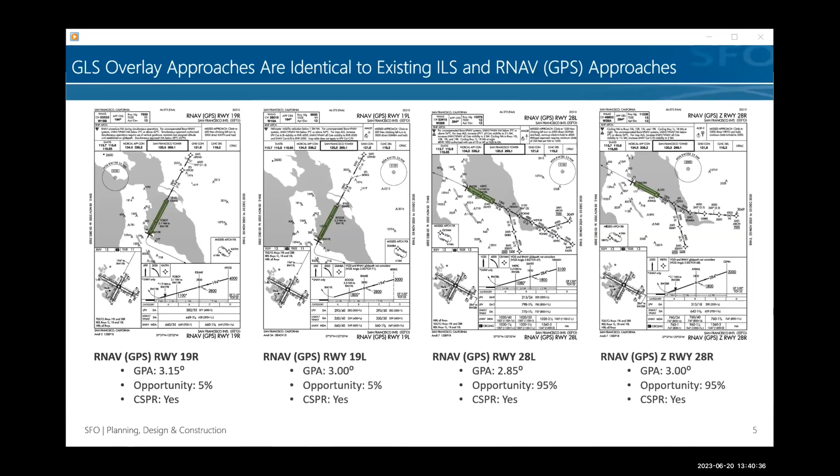The typical value recommended by the FAA is 3.00 degrees, but on runways 28 left and 19 right, you may notice that the GPA is different. These values are identical to the existing ILS and RNAV glide path angles and are established to ensure that both the existing ILS and soon the GLS can be used with the closely spaced parallel runway operation.

The next phase of the GBAS strategic vision is currently underway, which we refer to as Expanding the Capabilities. This is the first phase which provides an opportunity to achieve all 4 of the project goals, including noise reduction. This will be achieved through the implementation of what we call Group 1 innovative GLS procedures, along with other important safety and delay reducing enhancements to the GBAS and GLS.

The innovative Group 1 GLS procedures were first identified by an SFO GBAS Flight Procedures Subcommittee consisting of representatives from the FAA, airlines, manufacturers, and airport consultants. The subcommittee collaboratively worked through existing FAA instrument procedure design criteria to identify GLS procedures which could achieve the project goals without significant deviations from established FAA airspace and procedure design constraints.

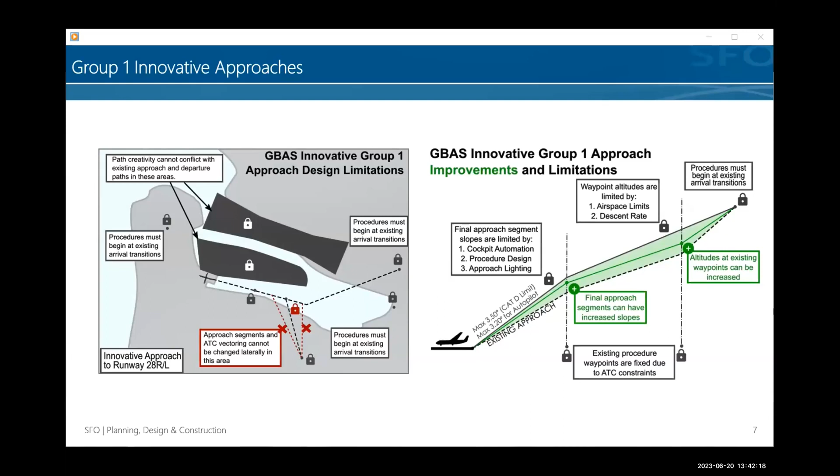These constraints, shown on the right-hand side, limited the ability for several existing procedures to optimize the entire descent into SFO, but still provided opportunities to explore higher altitudes in the intermediate and final approach segments. Within these constraints, 24 procedure concepts were identified by the subcommittee, resulting in 12 concepts that were put forward to the community for further feedback and evaluation.

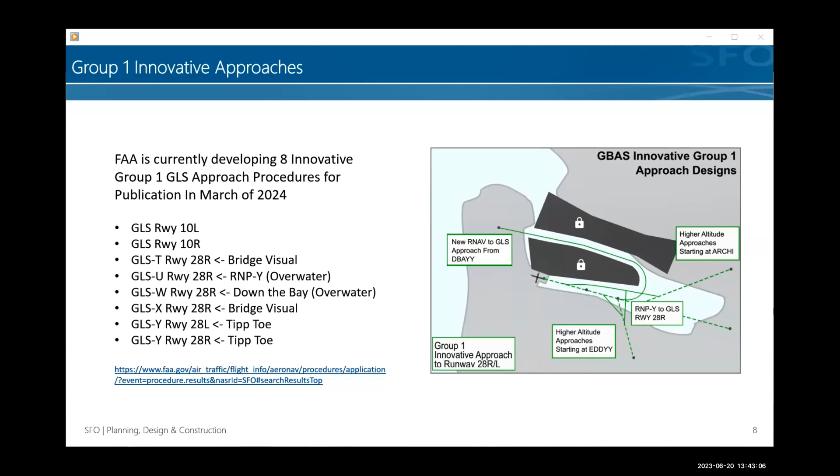Once the innovative Group 1 procedures have been published by the FAA, the SFO GBAS project team and SFO Noise Abatement Office will begin an important phase of the GBAS project, which we call Measure. This phase, which will come into effect during the Expand Capabilities phase, is intended to gather quantitative data about the effectiveness of the innovative Group 1 procedures at achieving the project goals.

Measuring a GLS procedure's ability to meet the project goals will involve a combination of examining which aircraft and airlines are flying the GLS procedures, comparing the aircraft and flight crew track to the procedure design track, and gathering noise information from both permanent and portable noise monitors. All information is intended for SFO to evaluate whether a procedure is succeeding at achieving the project goals or if it may be contributing to noise events.

If a GLS procedure is leading to increased noise, SFO's unique role as the owner of the NavAid will enable the team to temporarily or permanently deactivate that GLS procedure. However, if a GLS procedure is found to be achieving its project goals, then it may be worthwhile to explore methods for other non-GLS aircraft to take advantage of it where possible in a subsequent project phase.

The next phase of the GBAS project involves two different opportunities to better achieve the project goals. The first is to increase the utilization of any Group 1 innovative procedures that are found to have met the project goals of noise reduction, efficiency, and reducing delays. The second is to further innovate and improve with GLS procedures that either required deviations to existing FAA design criteria or had lower utilization opportunities due to aircraft separation. This second group of procedures that we refer to as Group 2A is actively being explored both with the Flight Procedures Subcommittee and with members of the public.

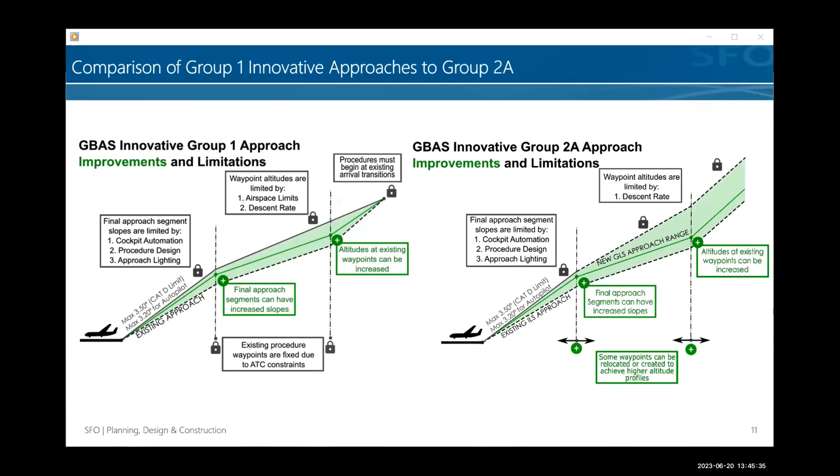Compared to Group 1 innovative procedures, Group 2A innovative procedures are permitted to take advantage of higher altitudes at the start of the approach, and even the possibility of relocating certain segments of the approach procedures to locations where they don't currently reside. Both of these may lead to more opportunities for optimized profile descent and noise reduction, but they have the side effect of limiting their overall usage to certain weather conditions or late-night operations when few other aircraft are in the vicinity of the airport.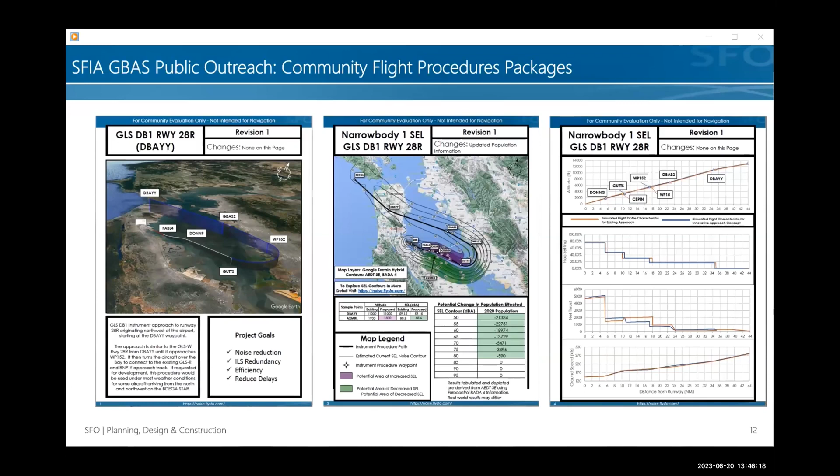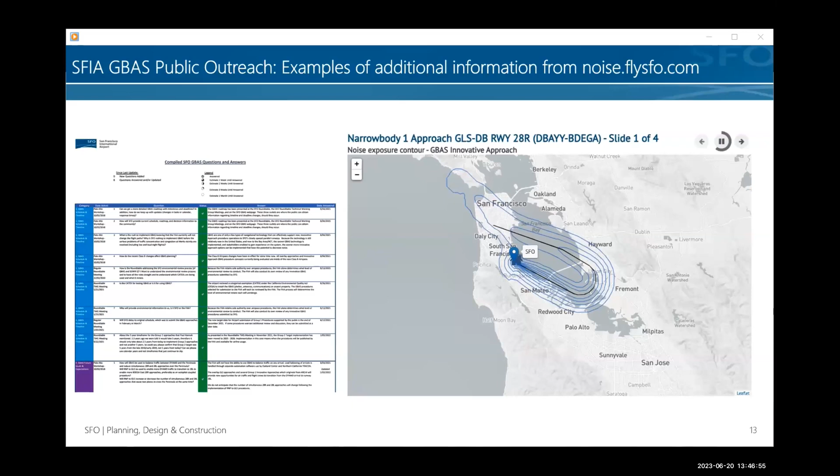Additional information about both the Group 1 and Group 2A innovative procedures can be found on the noise.flysfo.com website under the Ground-Based Augmentation System section. This includes interactive maps to permit interested members of the community to explore the calculated noise contours in more detail, including both SEL and LMAX metrics. It also provides an extensive question and answer section collected from public meetings and direct questions sent to the project team via the email address sfo.gbas@flysfo.com. Beyond Group 2A, the SFO GBAS project team will continue to seek out more complex and innovative solutions available to airports with an established GBAS and effective GLS procedures.

These include opportunities to explore dispersed flight paths using multiple precision navigation tracks, and even virtually displaced thresholds, which further increase the altitudes of aircraft over residential areas, reducing noise on long-established procedure tracks. However, there are barriers to exploring these future innovative GLS procedures, which will require additional investments in FAA staffing and technology. These investments cannot be provided by the airport and instead require continued regional, national, and even international collaboration with the FAA and airlines. But the project will continue to collaborate closely with members of the community to gather important insight on innovative GLS concepts to explore and gather feedback on aircraft flying current and future GLS approaches into SFO.